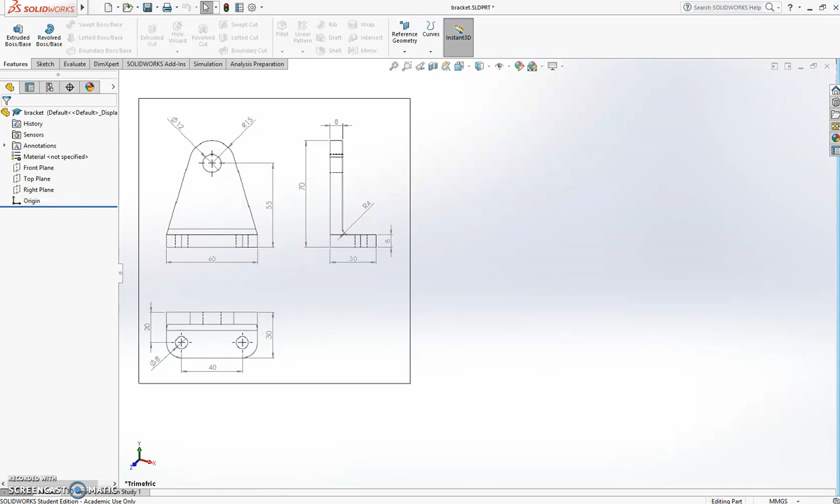I'm going to do most of the work in this elevation here, but the way this bracket lines up in the assembly means I'm going to sketch that elevation on the right plane, so that when I go to assemble this all together it will line up nicely for me.

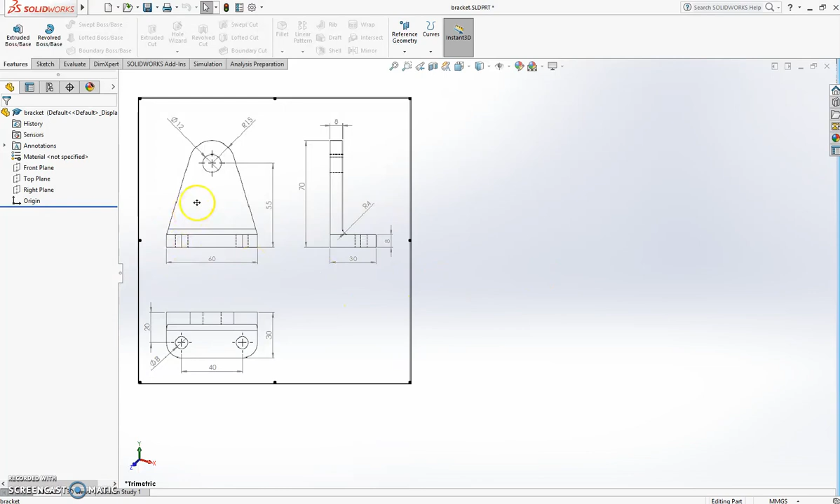I'm going to create a sketch on the right plane, a new sketch, and roughly draw out this view of it here. I'm going to set it up so that the origin will be here, but I suppose you could equally make it so that the origin is down at the bottom.

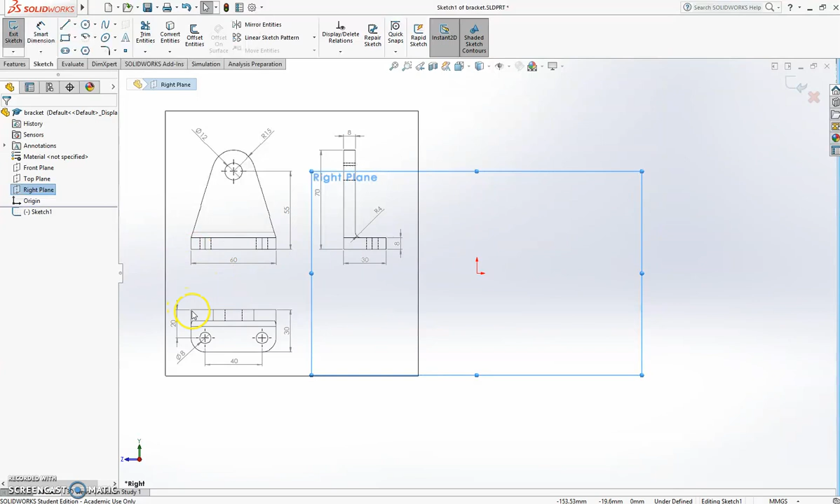Actually, I think I will set the origin down here so that it will line up when I go to assemble it all together. So I'll do it that way instead.

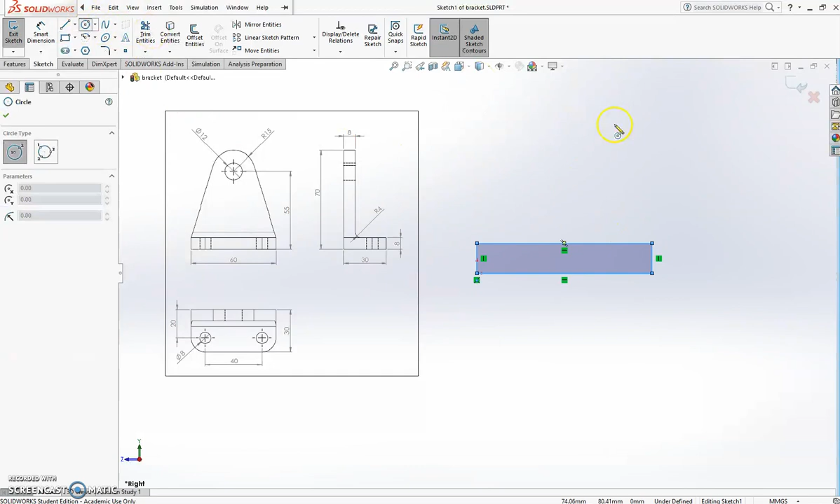So I'm going to draw a rectangle, and then somewhere above that rectangle I'm going to draw a circle and another circle.

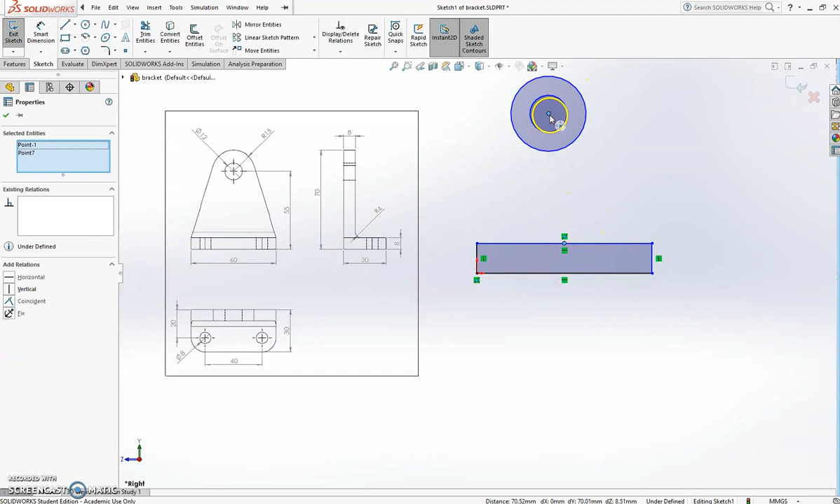Now in order for this thing to be symmetrical, what I want is the hole in the center to be above the midpoint of this line down here. So I can either hover until I find the midpoint, or I can right click and select midpoint, then control click on the center of this circle up here and put in a vertical relation.

Okay, so that circle now is above the midpoint of the rectangle, which essentially makes the part symmetrical.

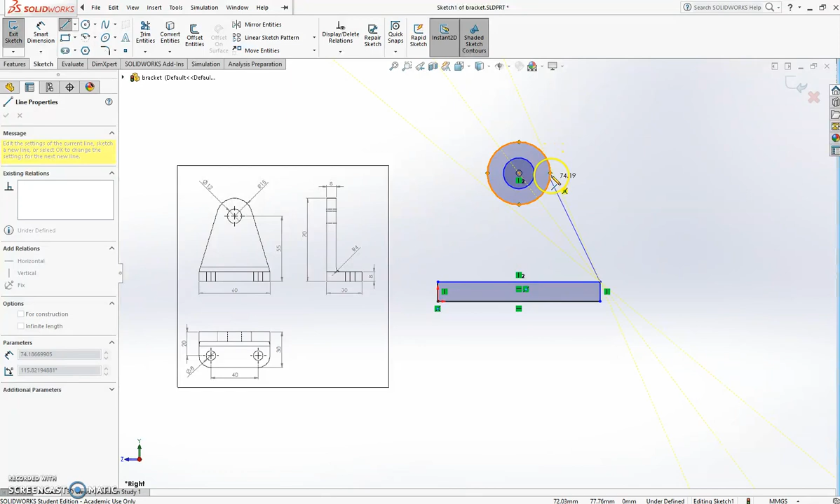Now I want to create a line, so right mouse button and left, and I'm going to create a line from the corner here, and I want it to be tangent to this circle. So just move around slowly until you see the tangent relation symbol appear. You could manually put that in as well, but I'll just get it to automatically do it here.

But just to demo it, I'll draw a line to show you that you don't have to rely on the automatic relations. I could take the point at the end of this line, control click on my circle here, and make them coincident, then take this line and the circle and add a tangent relation as well. So that line now will always stay tangent to the circle.

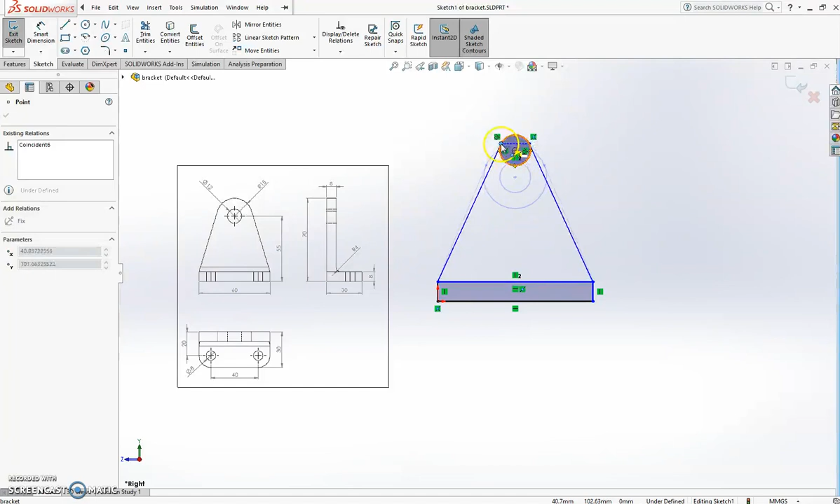You can see that the point where it touches off the circle changes as the geometry changes, but it always stays tangent to the circle there. So that is the general shape of the part.

I need to add in some more dimensions now to fully define it. So what we want is a dimension from the bottom of the part to the center of the hole of 55.

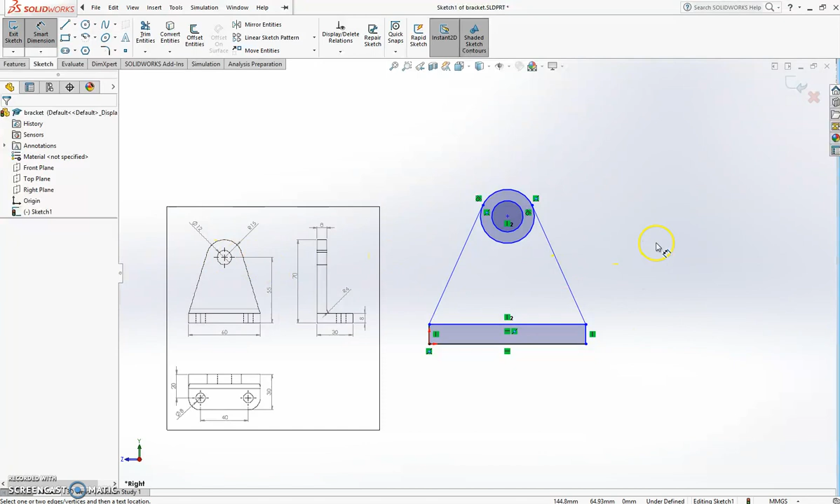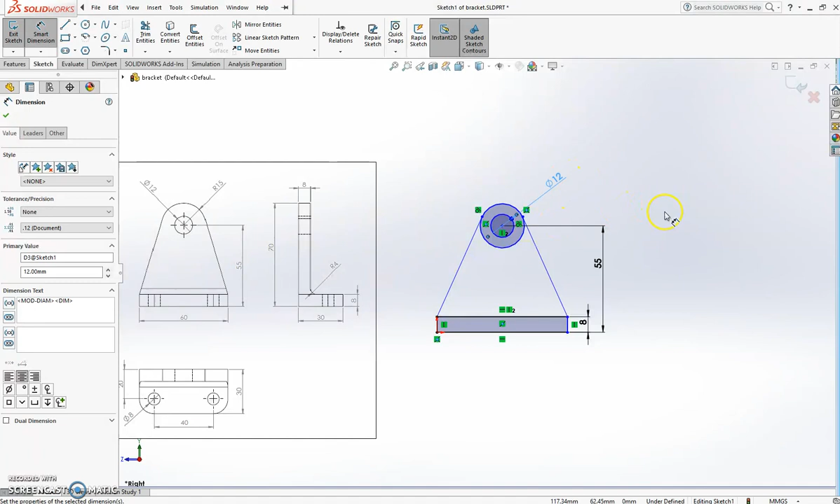We want the height of this part here to be 8, we want the inner circle to be diameter 12, and the width of the base here to be 60.

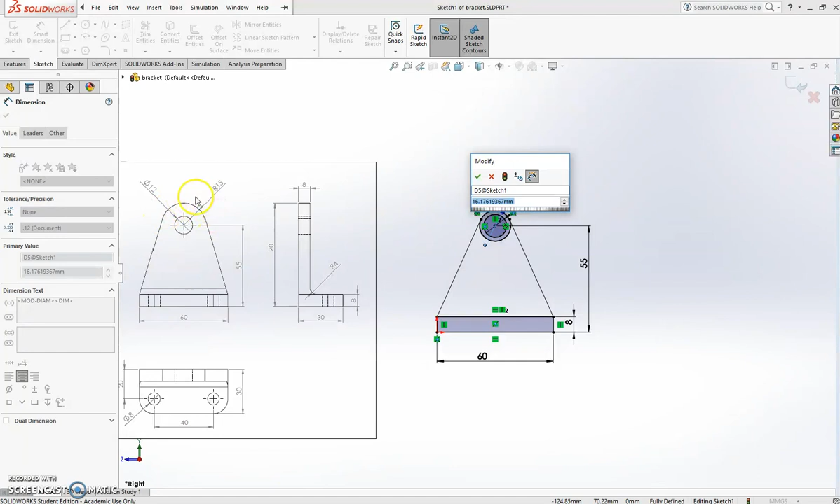Now if I put a dimension on this circle at the moment, I'll just do it to start off with. What I want when I finish up is a radius of 15 on that arc, but to do that I'll have to put it in as a diameter 30 to start off with. If you dimension it while it's a circle, you'll wind up with a diameter dimension.

I'm going to use the trim tool now to just trim away the bottom part of this circle here. You can use the trim tool in a number of different ways, similar to what you may be familiar with from AutoCAD. You can use it to trim away between lines, so I could trim the circle between these two lines, or use it to trim outside lines and that kind of thing.

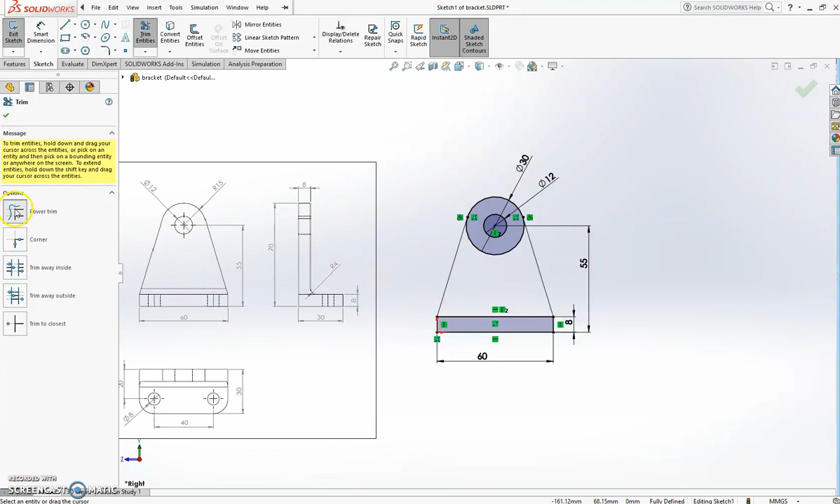But in a lot of cases the power trim feature is the most convenient. With the power trim you can just scribble with your mouse, with the left mouse button held, and whatever lines it crosses it'll trim away. Okay, so that's trimmed away. I'll close out of the trim tool.

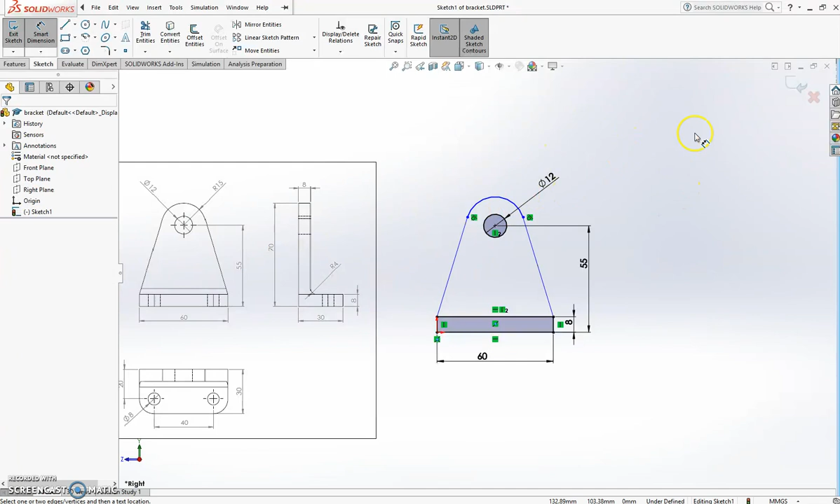I'm just going to delete that diameter 30 dimension and put it in again as a radius dimension. Right mouse button and up. I'll redimension this one now as a radius 15.

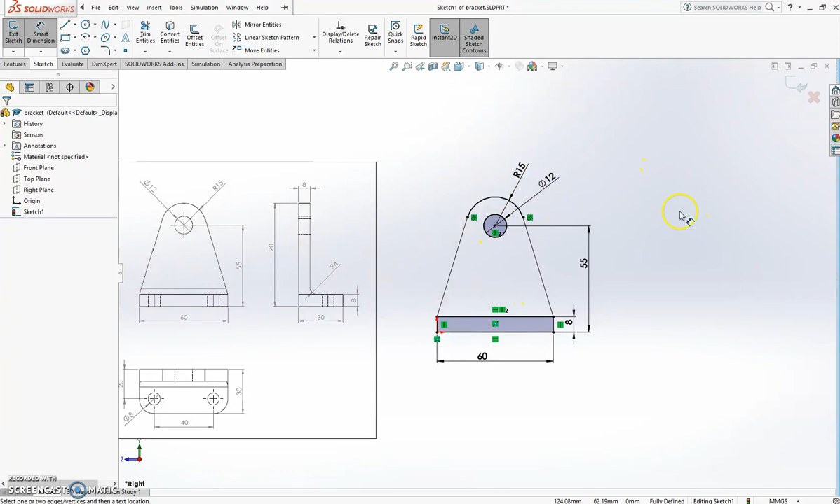Okay, so my sketch is fully defined, with a combination of dimensions, but importantly as well this vertical relation between the midpoint and the center of that circle. Once you're fully defined, you can close out of that sketch, and I'm going to take that sketch and extrude it in two separate features.

One feature I'm going to create this 8mm thick web sticking up here, and then the 30mm long base sticking out of this.

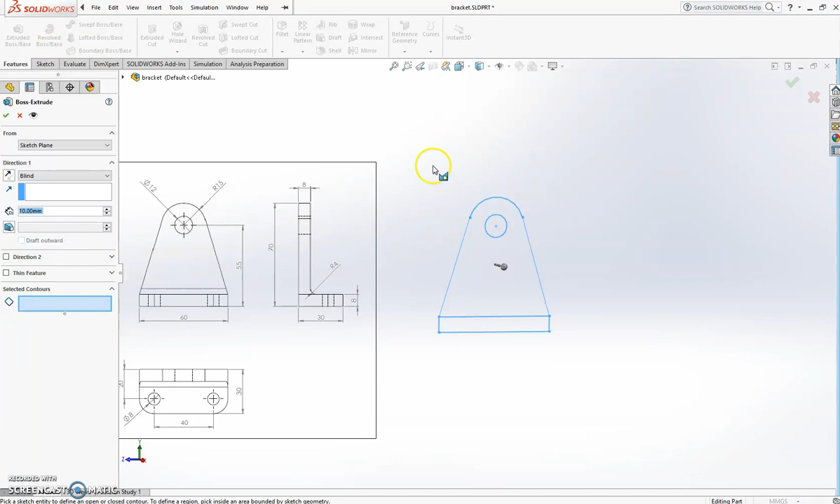So I want to take sketch 1, go to features, and create an extruded feature. It's going to extrude out in this direction, out in the X direction from the right plane. Because there are multiple areas in this, I have to select what contours I'm going to use. So I'll do one for the 30mm here, and then a separate feature for the 8mm thick one.

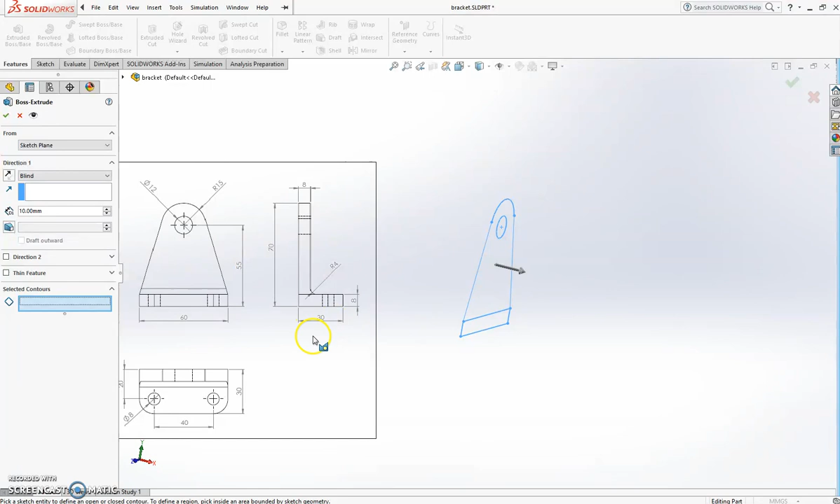I'm going to extrude this contour out in that direction by 30mm, and you can click and drag the arrows, or you can type in your 30mm here.

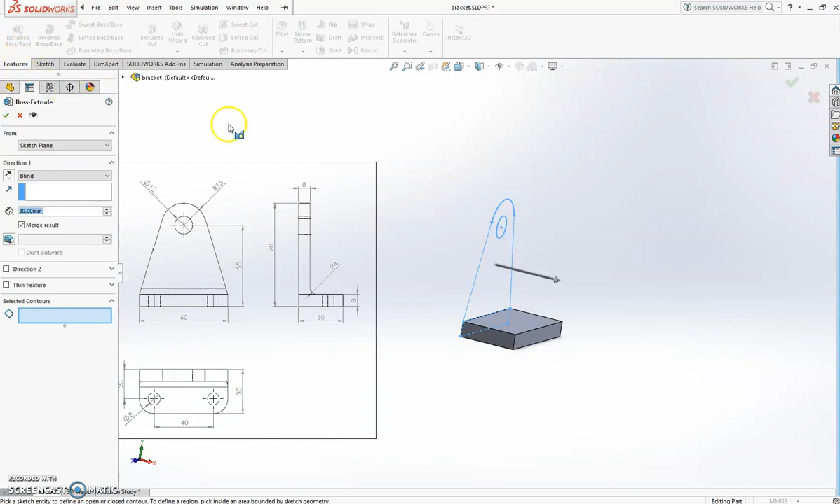I'm going to use that sketch again to do another extrusion, this time selecting this contour here, and extrude that out by 8mm, or again just type in your 8mm.

If you want to go back in and change what you've done in a feature, you can right click and go edit feature.

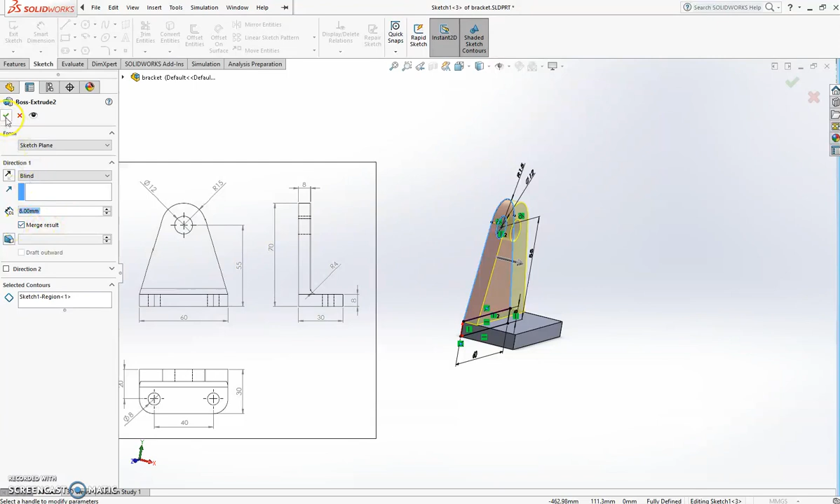I just wanted to point out this little option here, the merge result checkbox. So I have two separate features that are part of the same body, and as long as this merge result checkbox is on, these two features, when extruded, are merged together to form a single part or a single body.

So we have the bulk of the work done here. What we need to do now is create two holes, and then lastly I'll add in the fillets.

So I want to draw the two holes on this surface here, and again, as previously, I could use the extruded cut feature, but I'm going to use the hole wizard.

The holes themselves are just plain diameter 8 through holes, but if you wanted to do any kind of countersink or threaded holes or counter bores or even a reamed hole, you would need to use the hole wizard. So it's probably good practice to just get used to using the hole wizard.

I'm going to use the hole wizard and select the type of hole that I want, just a plain hole. It's ISO standard drill sizes, diameter 8, but for example you might want dowel holes, which would be a finer dimensional tolerance, or you could have a screw clearance for an M8, which would be maybe an 8.5 or something like that, or a tap drill for an M8, which would be 6.8 or something like that.

I'm not entirely sure, but for just a plain hole, we want drill sizes for a diameter 8, and the end condition will be through all, so it goes all the way through rather than being a blind hole. There aren't any countersinks necessary in this case.

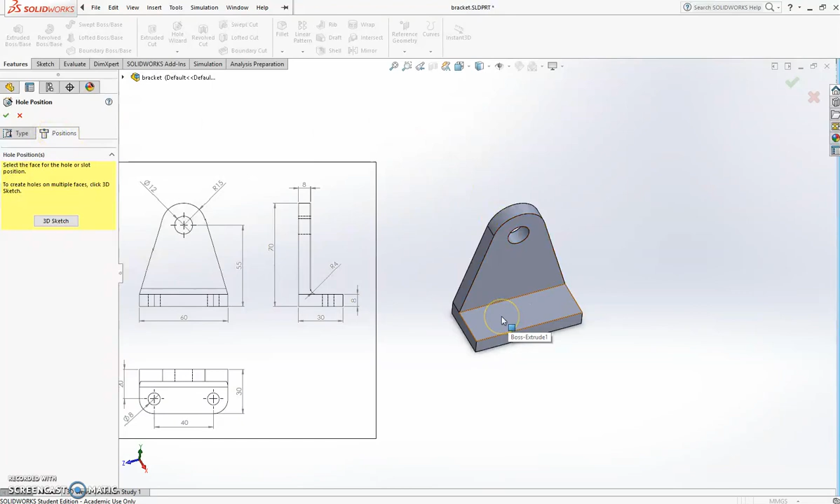So for the position of the holes, we want to select a plane, so I'm going to select this plane here and place 2 holes somewhere on that surface. Mouse button and normal to, spacebar and normal to, and to find the position of these holes I'm going to do a center to center dimension of 40 millimeters.

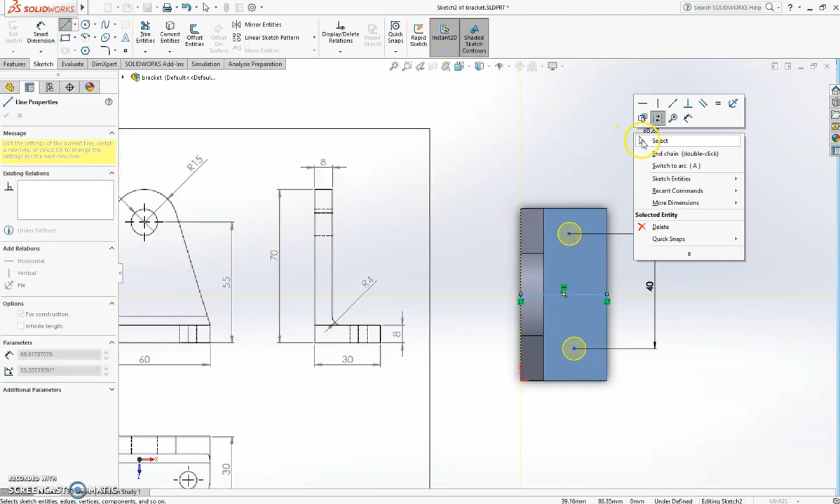To make them symmetrical, I'm going to create a center line here, which I think is probably the appropriate way to do this. So I'll create a center line from midpoint to midpoint and make these 2 holes symmetrical about that center line.

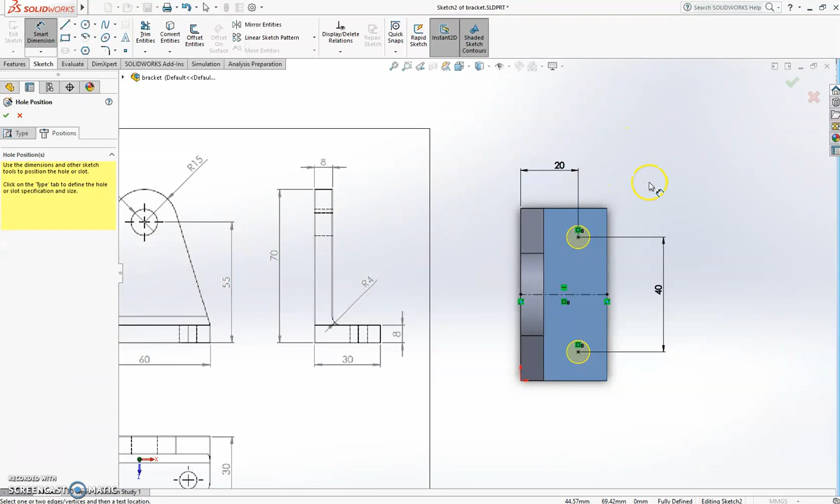Lastly we just need to define the position in the X direction here. So smart dimension from this back surface to the center, 20 millimeters. Okay, and that now is fully defined, so we can close out of that sketch and it'll generate the holes.

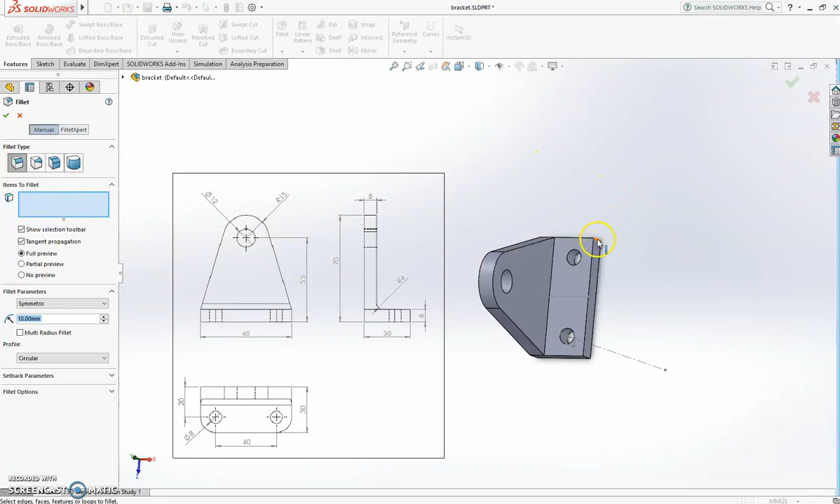Last thing I need to do now is just place these fillet radii. I'm going to use the fillet tool. The items to fillet will be this corner and this corner with a radius 10. Now that isn't specified, it's not spelled out in the drawing, but it's a radius 10.

Okay, and that is the completed part. Again, we'll just check. It should be modeled in such a way that if you change any of these dimensions, it doesn't affect the overall design intent. This will stay symmetrical and so on.

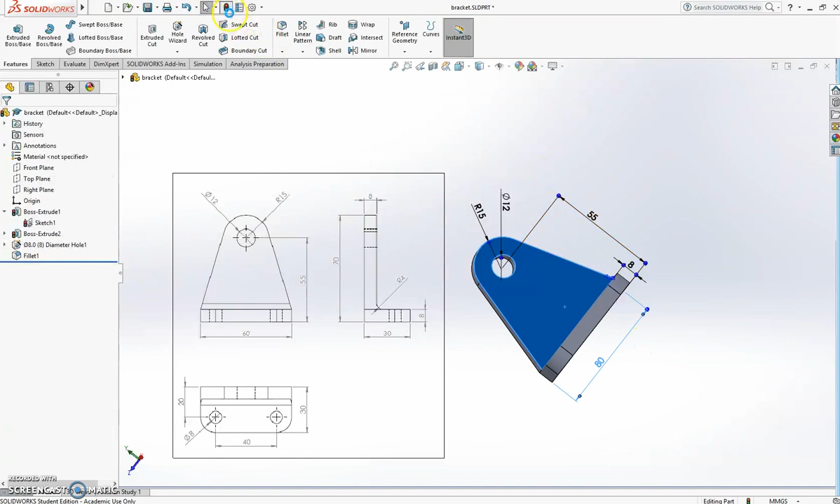So we'll change that to 80 and rebuild it just to see what happens. If we change it to 80, you can see the part remains symmetrical. Everything should be dimensioned then to suit the overall assembly.

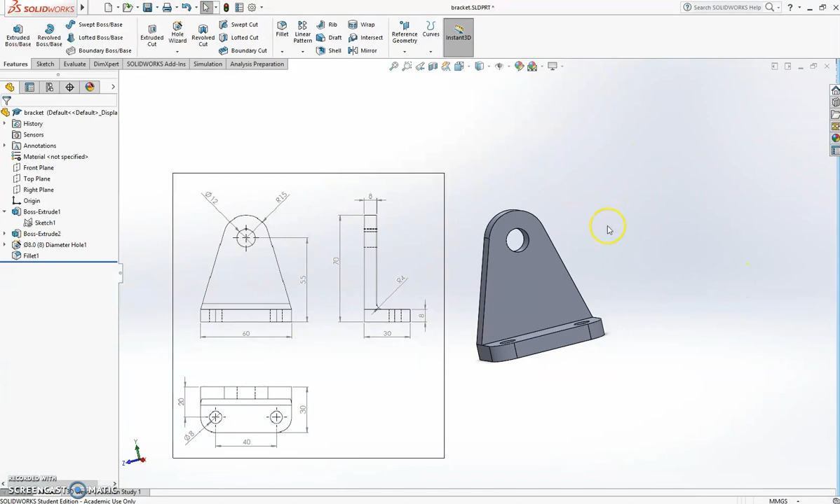Okay, so just undo that. That is the finished bracket part. Save that into the same folder as the previous parts, and I'm going to finish up the video at that. Okay, thanks for watching.